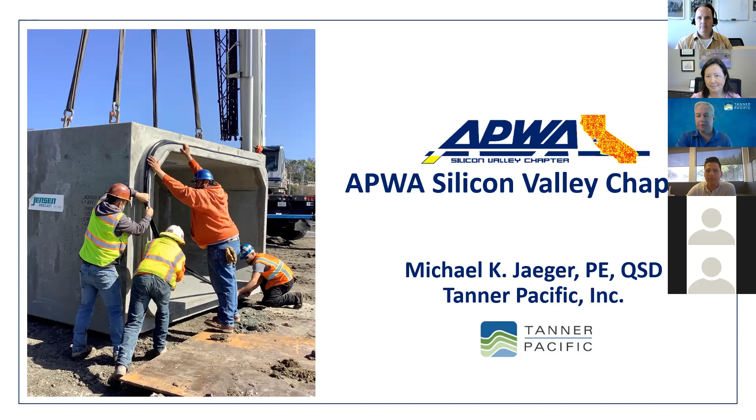Okay. So thank you for allowing me to have a few minutes here. I'll try and go through this pretty quickly, but Tanner Pacific, I'm a principal partner of the firm that helped found the firm. We are now celebrating our 5th year, and I think 3 or 4 years as members of APWA. So really enjoy being a part of this chapter. And another one of our engineers, Marina Chekmarova, who couldn't be here today, is also an active member. So we continue to be active in the chapter.

We have 42, soon to be 44 employees. And we have a variety of team members, from technical inspectors in the field, office engineers, CMs, and administrative staff, to make sure that the company runs smoothly, do all the things that we have to do. Our main office is here in San Carlos, but we're growing. We actually are trying to develop an office in Seattle and another office down in Southern California. So things are growing carefully, but we're very excited.

So a little bit about us. We like to do construction. That's our big thing. We are construction managers first and foremost, mostly in water resource type projects. But we're building and we're growing. Some of the areas where we're growing is on the program management side too, becoming owner advisors early on. And we've included some people in our firm who have a lot of that experience. And so we are working on some large programs around the Bay Area, and as noted, in the Seattle area and in the Southern California area. So it's another facet that we are growing.

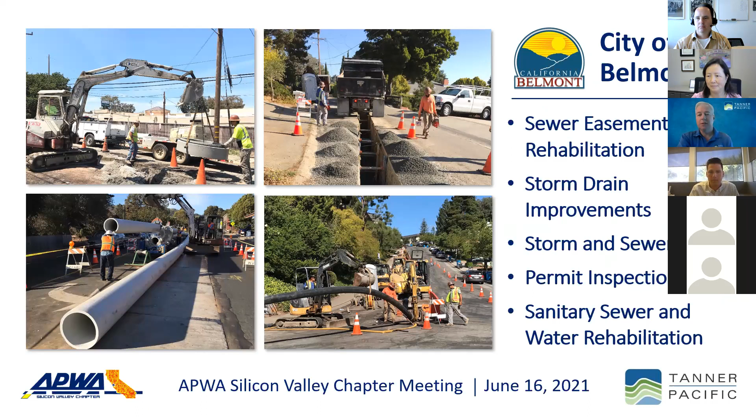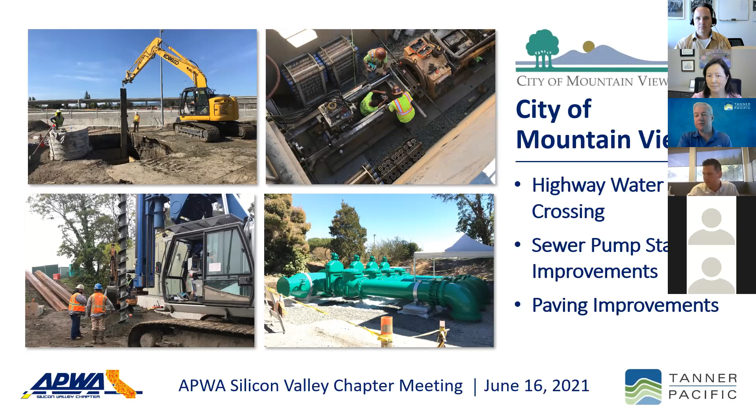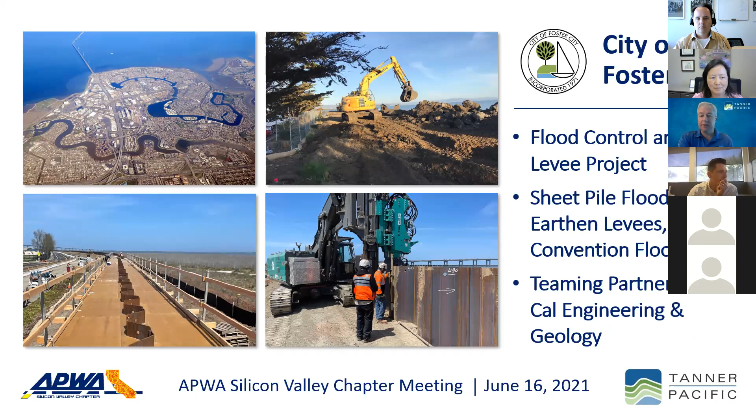Another very interesting project is one of the first levee improvement projects for sea level rise on the peninsula in Foster City. And speaking of teaming, the next person to present, Dan Peluso, is part of our team, Cal Engineering and Geology. They're a very, very important member of this team because of the type of work that's going on. And they were very integral in helping us win this project. So we're very happy to join them and continue to look for opportunities for us to work together.

Right. Dan? Can you hear me? Yes. All right. Let's see if we can get this going here.

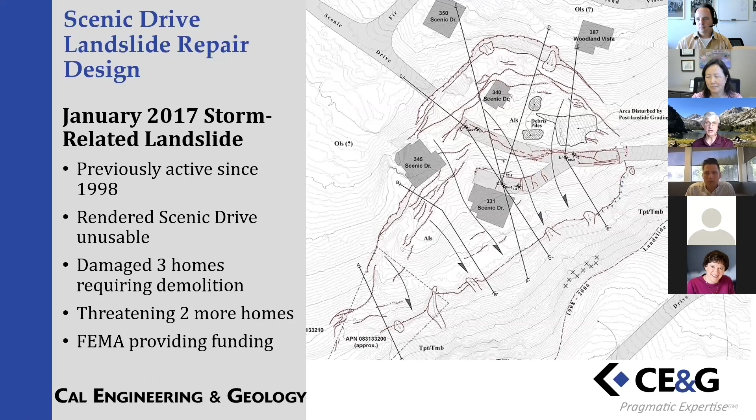Landslide repairs are some of my favorite projects. This landslide you see an image here is in a neighborhood in La Honda, San Mateo County. A fairly sizable landslide kicked off in 2017, and they contacted us to not only evaluate a geotechnical design, but also prepare plan, specs, and estimate for the repair. And that is supposed to go into construction this summer.

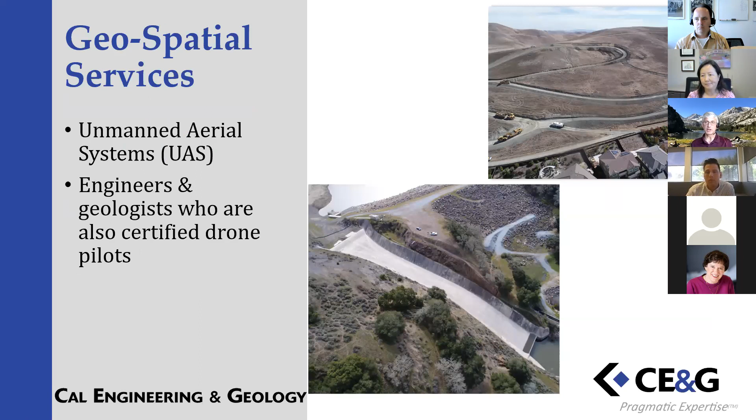Our geospatial services include unmanned aerial systems like drones. We use them for anything from preparing topo maps, using it in our construction management for change detection, and also inspection of spillways and a variety of other things. Our GIS specialists have created a geo viewer that I use regularly internally to look at various maps that they've uploaded to our system. We've also created a project-specific web portal for the Foster City project and other projects that allows the people involved to track certain information, and it's been very helpful. We also offer LiDAR scanning for things like pre-construction surveys and a variety of other usages.

Our staff also provide expert engineering assistance to various agencies to oversee public works projects, review development plans, and provide geotechnical peer review for submittals to the cities. And lastly, next time you go to check your Facebook feed, maybe go to the App Store instead and check out our app. It's called CE&G Now. What it does is it allows anyone like Public Works agency staff to take pictures of, say, a damaged slip out of a roadway, type in a message and send that to our project managers so they can get a response from us right away.

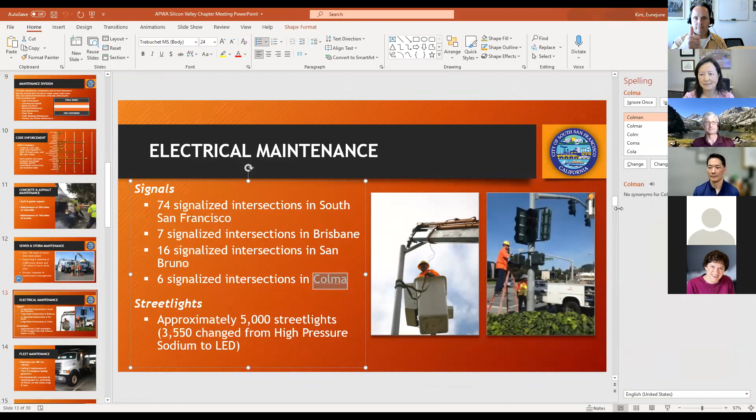Thank you, Lisa. I'm going to share my screen. Let's see how I do this. Here we go. You guys see my screen? Yes. Let me see here. How do I get rid of this sidebar? Go to slideshow at the top and do start slideshow. There you go. Okay. From beginning on the far left there. Yeah. All right.

So my name is Eunejune Kim, Public Works Director and City Engineer for South San Francisco. Thank you for this opportunity to showcase South San Francisco. As you guys know, we are located in the Bay Area, just south of San Francisco, north of San Bruno.

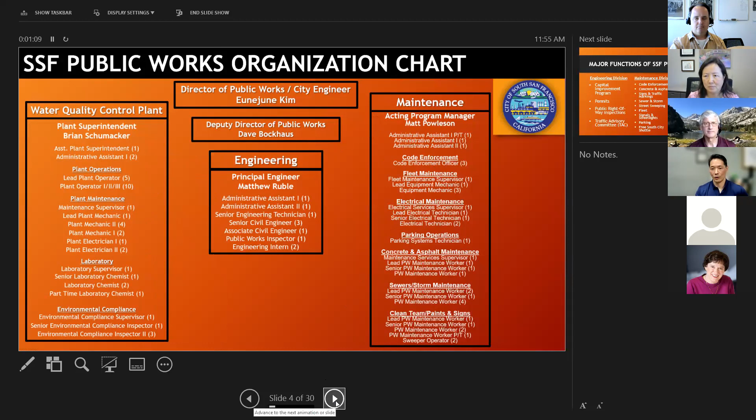We have three major divisions in our department: the wastewater treatment plant, we call it the water quality control plant. Engineering, Matt Ruble, the principal engineer, is also here today. And we have our deputy director, Dave Bockhaus, here. And we have our maintenance division, a lot of different services: code enforcement, fleet maintenance, electrical. I'll go over these in the next few slides.

So engineering division, as you guys all know, has CIP and permit reviews, traffic advisory committee for a lot of the traffic calming requests we get through this city. Our maintenance division is pretty robust. We provide services to other agencies, and I'll go over that in a little bit. But we also have a free South City shuttle and parking lots that we maintain in our wastewater treatment plant. We service adjacent cities nearby, as well as the San Francisco airport.

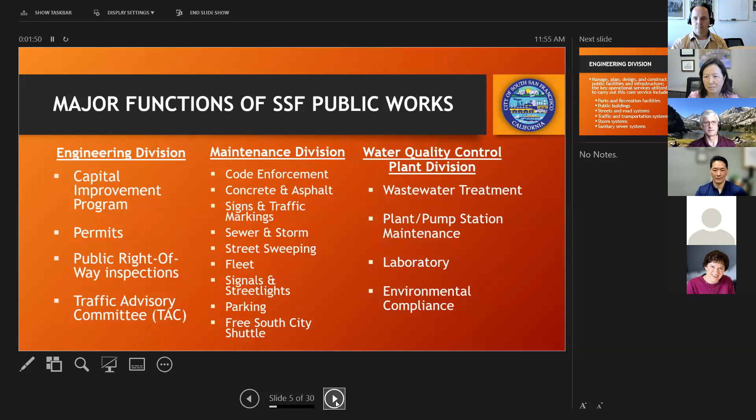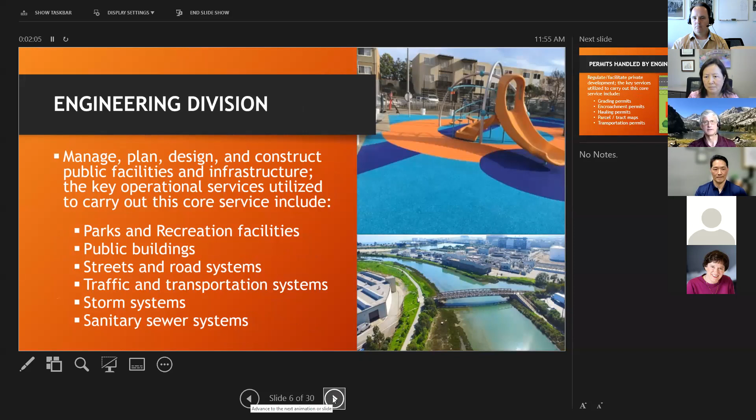So let's go over the engineering division. We do parks and rec facilities, buildings, streets and roads, traffic, storm drain, and sewer. Some of the permits that we handle in engineering is review of grading permits, encroachments, hauling permits, review of subdivision maps, and transportation permits. Our CIP budget is about $280 million for the next fiscal year. A good portion of that is in sewer, public facilities, streets, and then you got traffic and storm drains and parks.

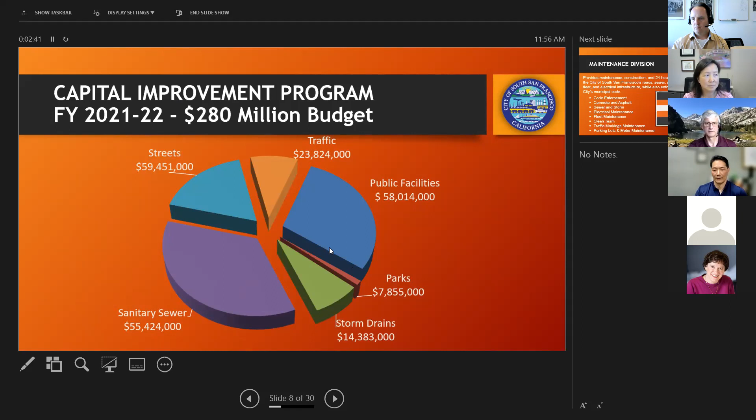In our maintenance division, we try to provide 24-hour response, especially to sanitary sewer overflows, but also to like signal knockdowns. Especially these days, clean team is a big issue. I think if you guys are with a public agency, there's a lot of homeless encampments and illegal dumping going on, which is a continuous problem in the Bay Area.

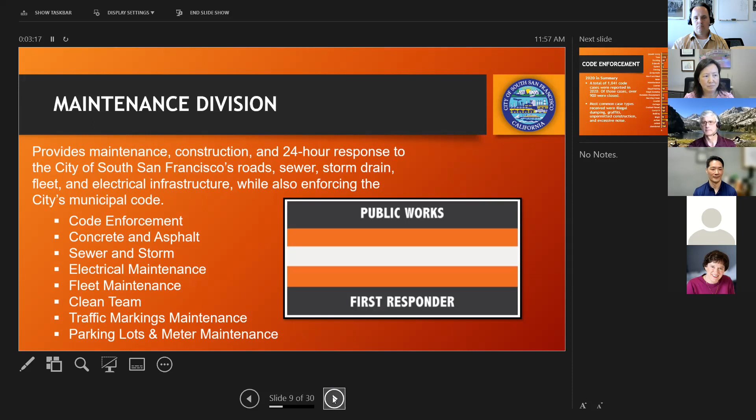So in our code enforcement, we have a lot of cases that get reported. And, like I said, the majority are illegal dumping, graffiti, some unpermitted construction noise, but the common complaint is basically illegal dumping, garbage, homeless encampments. So kind of melds all of that together.

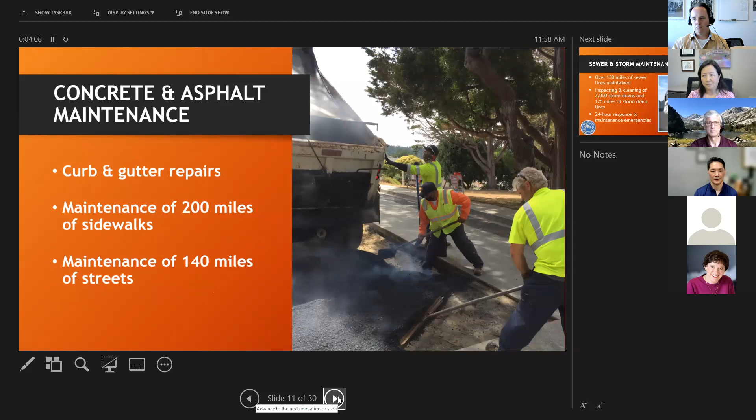Concrete and asphalt maintenance. We have over 200 miles of sidewalks, 140 miles of streets that we work to maintain. So we just do spot repairs for the most part, and the CIP projects take care of the larger planned maintenance. And that goes the same with sewer and storm. 24-hour response is our goal, and we pretty much adhere to that.

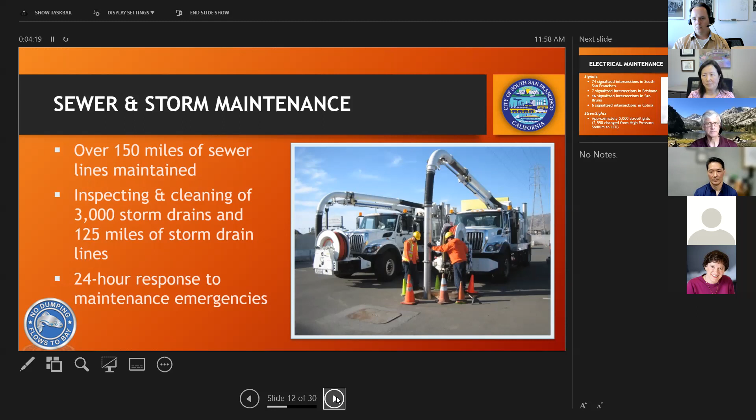We have 74 signalized intersections in South San Francisco, and it's growing because we're putting in more signalized intersections. We have 4 underway right now, and that'll be bumped up to nearly 80. We take care of the 7 signalized intersections in Brisbane, 16 in San Bruno, 6 in Colma. We have about 5,000 streetlights as well.

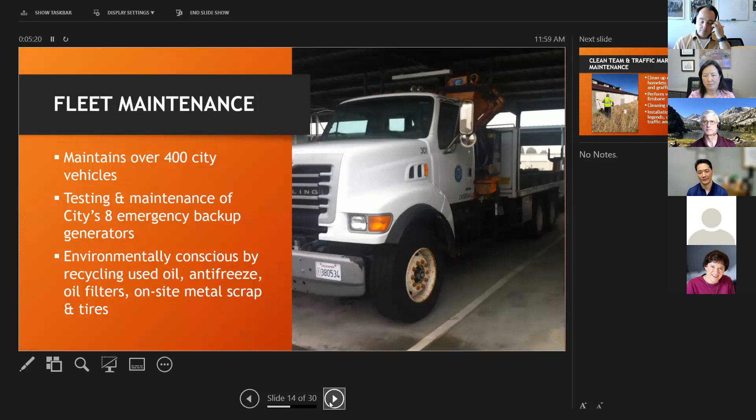We do fleet maintenance. We have over 400 city vehicles, and we try to be environmentally conscientious, recycling used oil, antifreeze, etc. But we also have recently installed about 40 electric vehicle chargers, and we have just started to electrify our fleet with an order of 2 Chevy Bolts for our code enforcement division. And those will be our first electric vehicles in the city.

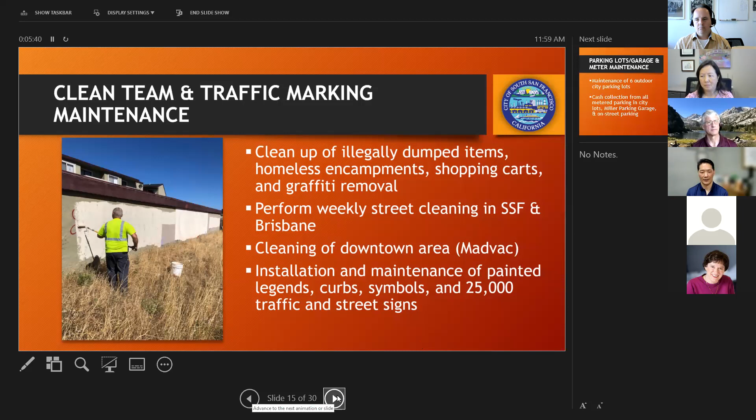A clean team takes care of the graffiti, illegal dumping. We help out Brisbane with street cleaning sometimes, and refreshing the symbols and the markings and the signage. We have parking lots and the parking meters associated with our downtown we maintain.

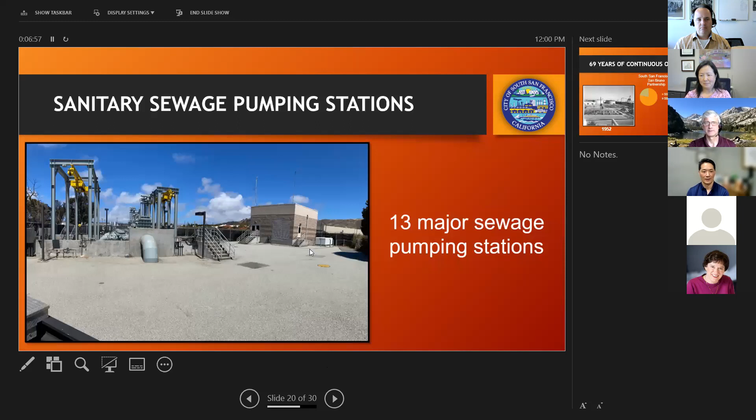Our wastewater treatment plant is happily taking crap from our residents since 1952. We have a lot of work going on here, probably close to $100 million of work going on right now under construction. Over 150 miles of sewer lines in the collection system, 13 major sewer pumping stations throughout the city. And we'll get more into the improvements at our wastewater treatment plant.

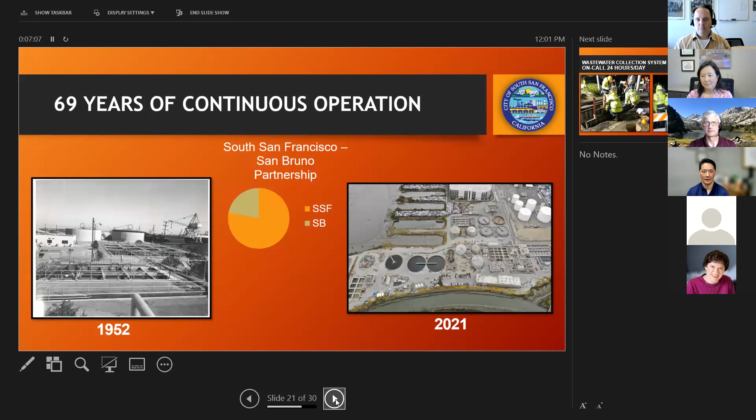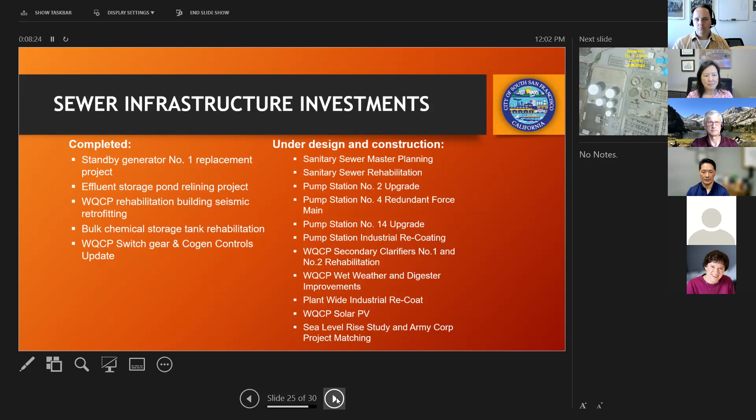So, as you guys know, a wastewater treatment plant requires a lot of continuous maintenance work, as well as a lot of upgrades due to the changing environmental regulations. So under construction, we have not only our pump station upgrades and our normal re-coatings and redoing our SCADA and cogen and our electrical infrastructure. We're also doing a sea level rise study for potential sewer and to protect the plant from sea level rise because the outfall is near the bay.

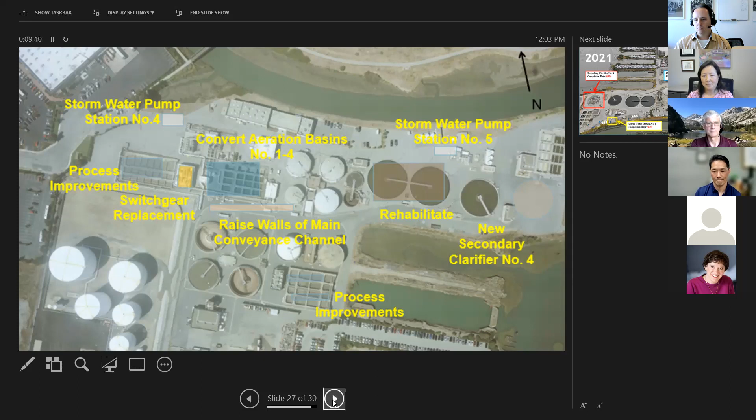One of our clarifiers is being upgraded right now, and that's under construction. For our digesters, we took out two and put in one more efficient and larger one for a better digestion system called the Omnivore. If you guys aren't familiar with wastewater treatment, you probably wouldn't know that. It's pretty proprietary, as well as completing some different rehabilitations.

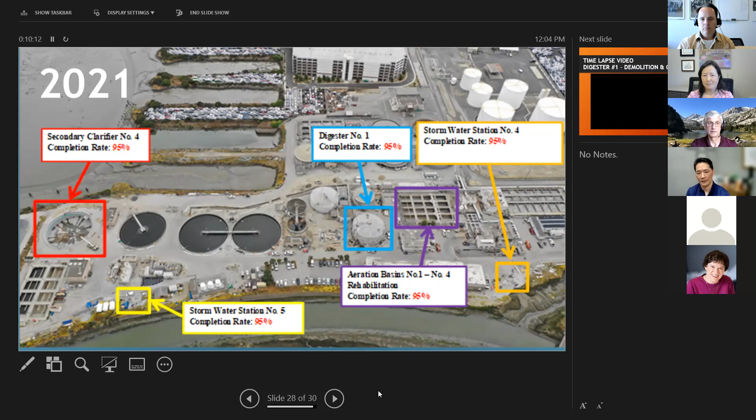Basically, our treatment system was only able to provide about 35 million gallons per day of primary and secondary treatment, but the EPA requires everything to be treated because we experience up to 60 million gallons per day during high storm events. So we upgraded the treatment capacity to have primary and secondary treatment of everything going through the system.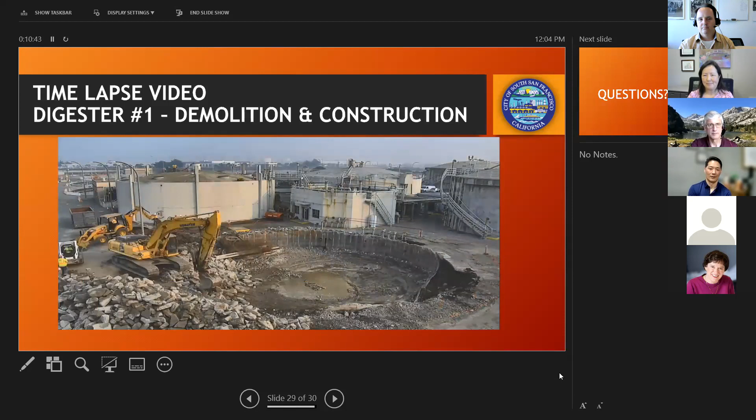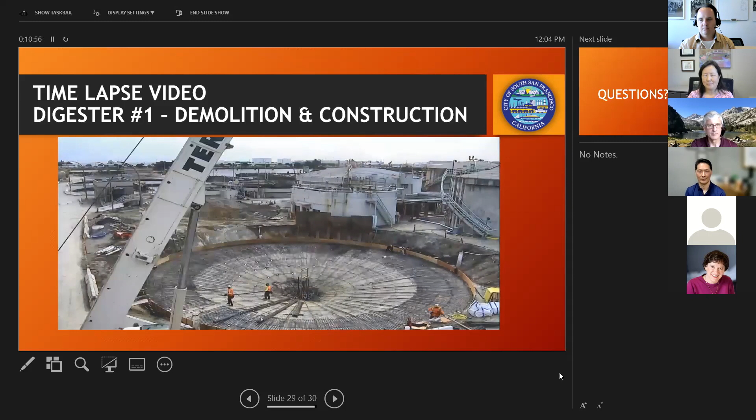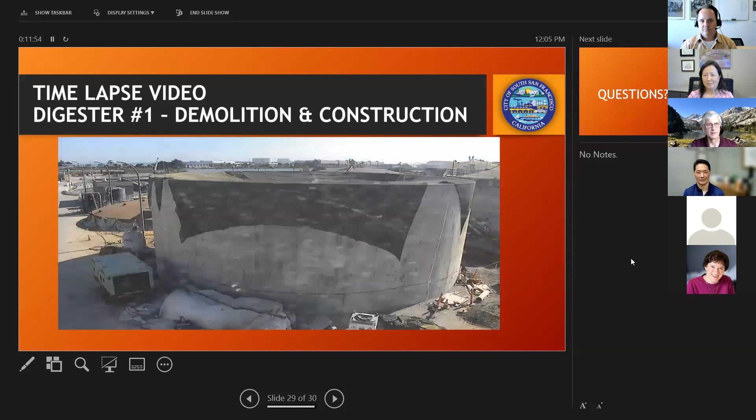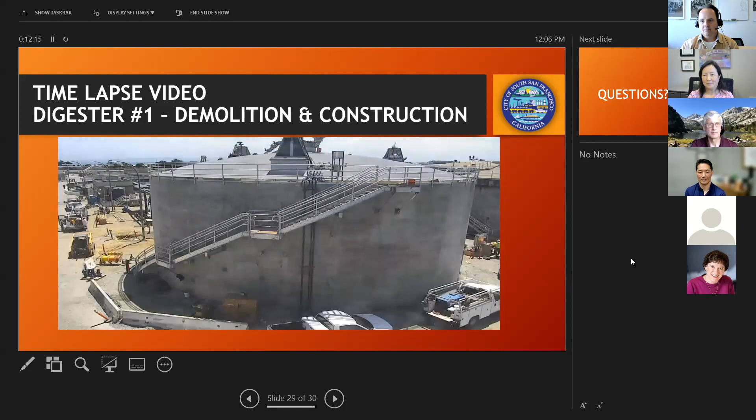Here's a time lapse of the construction going on. Let's see if we can do this. Here it goes. This is the digester that's being upgraded. Demo the old one, put in the pad for the new one, piping. The prime contractor on this particular project is Flatiron. Voila.

Questions from the group? Anyone have any questions for EJ? Oh, I definitely learned a lot about your city, EJ, that I never knew about South San Francisco. Your department offers a wide variety of services. Yeah, really interesting. The wastewater treatment plant serves San Bruno, Colma, SFO, Millbrae. So it serves a little community over here, basically. Yeah, it's interesting to learn about your collaboration in helping other cities service their streetlights, and this partnering at the treatment plant. That's really unique. All right, well, thank you for your time.

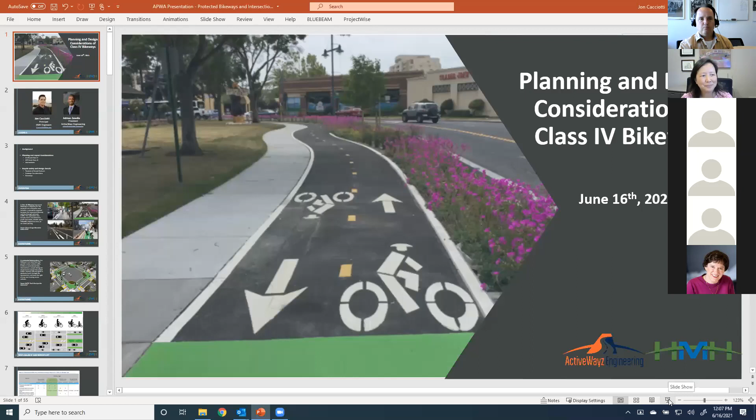Yeah, thank you. All right, now we'll move to our main presentation for today. The presentation is on the planning and design considerations of Class 4 bikeways and protected intersections. We have two of our board directors giving the presentation. Atmas Zudi is the founder and president of ActiveWayz Engineering, a San Jose-based transportation consulting engineering firm focused on active transportation project delivery. Atmas has over 22 years of experience in planning and designing various types of transportation projects. Since founding ActiveWayz, he and his firm have primarily focused on delivering active transportation in the Bay Area. In his design approach, Atmas looks to develop solutions that enhance safety for all road users by focusing on simplicity of design that leads to intuitive, predictable, and forgiving transportation infrastructure for all users.

And Atmas will be joined by Jon Cacciotti. John is the principal of HMH Engineers and leads their public projects team. John graduated from San Jose State University and has 15 years of experience leading active transportation projects. He has led the bicycle and pedestrian elements on dozens of local roadway and Caltrans interchange projects throughout the South Bay. So without further ado, we'll have Atmas and John begin their presentation.

Thank you, Lisa. Can I have someone confirm that you can hear me and you can see my screen? Yes. Perfect. Thank you so much.

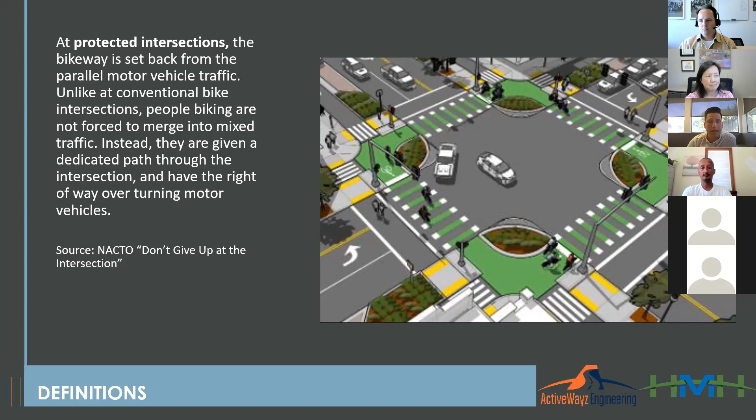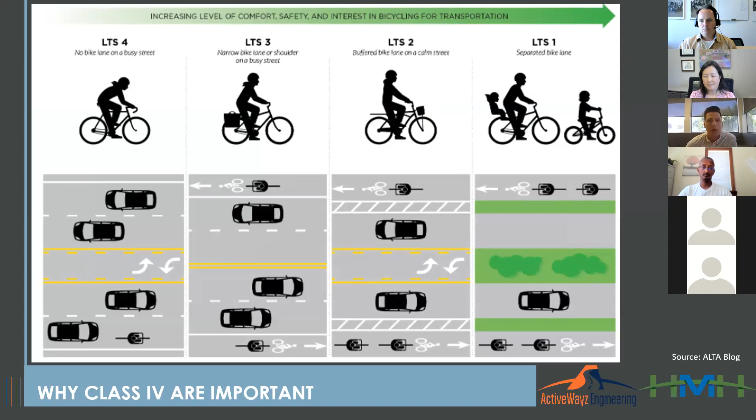So why are Class 4 bikeways important? Alta did a good study a couple of years ago on just the level of traffic stress. On the left is essentially no bike facilities. On the right would be a fully separated bike lane. And very intuitively, they found that as you increase the infrastructure associated with your bikeway and increase the separation, that level of traffic stress is decreased. And so your users are more likely to want to use the facility, and the perceived safety is increased.

So we're really not focusing on those strong and fearless with Class 4. It's about moving those interested but concerned up a notch into that enthused and confident group, and getting them excited about making that mode shift.

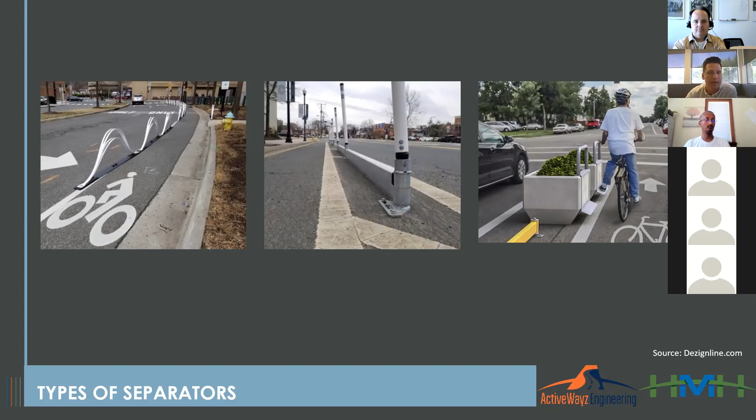One of the first things we always do is look at your cross-sectional width. Some pretty easy questions that are always asked is, can your lane widths be reduced? Do you want a hardscape or a landscaped buffer? Do you want to use this buffer for C3 treatment? There's a great opportunity there if you've got the right of way to incorporate C3 treatment, consistent with a lot of local council goals for rolling out stormwater treatment on your roadway projects, even if it's not technically required for a bikeway project.

One gotcha that we've seen a lot is considering shoulders. That bottom image down below is a buffered bikeway. Very often in planning documents, we'll see the recommendation to be, hey, slap on a bike buffer or a curb or delineators and turn this into a class 4 bikeway. That's great, but local agencies should be deliberate and recognize that by eliminating the ability for a vehicle to drive across your buffered bikeway, you are eliminating the shoulder.

Per Caltrans, class 2 bikeways are considered shoulders. Class 4 bikeways, because they are not navigable by a vehicle, are not shoulders. So you should be thinking about your disabled vehicles or emergency operations and being comfortable and seeking those design exceptions if you're proposing a facility that would eliminate shoulders that are there in the existing condition.

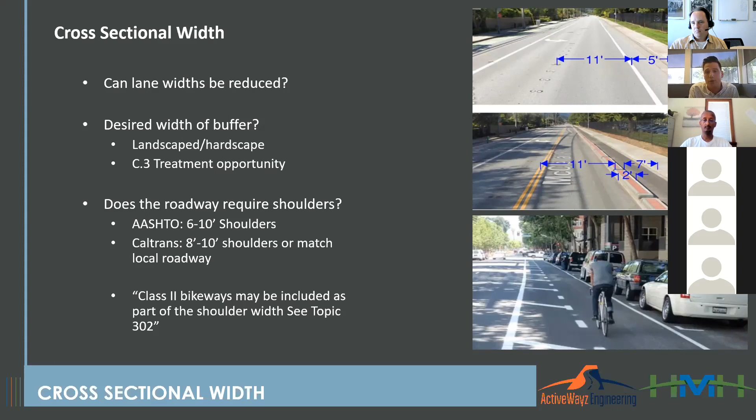Another one that many agencies are seeing and aware of, but make sure you know what your street sweeper width is. I've worked on a handful of projects that in the planning phase, it says, yep, we want a 6-foot bikeway. And when the rubber meets the road in design and maintenance is finally looking at the project, they say, wait, our minimum sweeper width is 10 or 12 feet. We can't get in there to maintain this bikeway. So we need to step back and reassign that roadway width or the bikeway width to be able to accommodate street sweepers. Some agencies have procured modified street sweepers that are out on the market, like the one shown here in San Francisco that has variable width sweepers and can accommodate those narrow bike lanes.

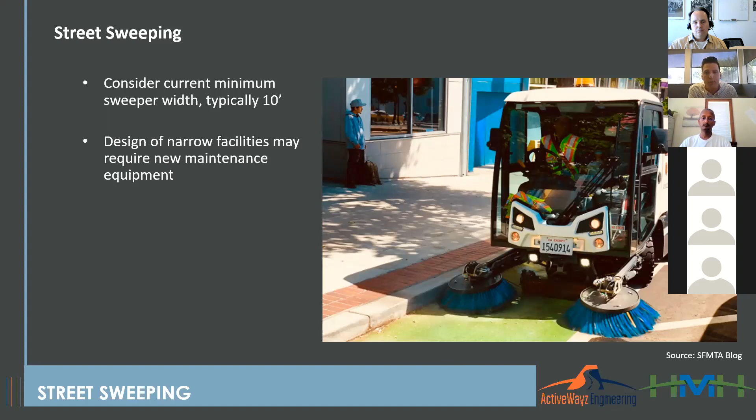As you move into the off-street environment, these are sometimes known as the Dutch style bikeways or off-street cycle track, sidewalk level. There's a new slew of complexities that get introduced as you have to deal with the interface of your bikes and pedestrians. One thing that we've learned and heard pretty consistently from the local biking community as we meet with various BPAC groups and bike advocacy forums is having redundant accommodations for your high-speed cyclists.

This is an excerpt from our 280 Wolfe project where we have signalized perpendicular crossings for those all ages and abilities users, those bicyclists that may not be comfortable merging with high-speed freeway bound traffic, which obviously is very complex. So we've got actually duplicate facilities here. The high-speed cyclists like this weaving with your right turn pocket as shown in red, but then we've got the duplicate facilities in green for those all ages and abilities users that don't mind waiting at a stoplight and would much rather queue up there rather than have to weave across vehicles. So bikeable shoulders and redundancy for all the different types of users you expect is something that will affect your layout.

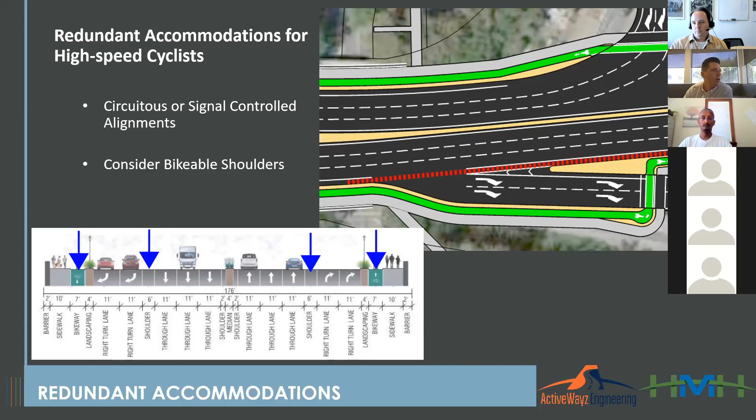Thinking about the separation for bikes and pedestrians, there's really not great guidance. It's very vague right now about how to separate bikes and pedestrians on these facilities. You want to be thinking about something that's navigable, flexible, can maintain ADA compliance, so a visually impaired user is not accidentally crossing into your bikeway and subject to a collision that they may not know they're in an area that they're not supposed to be walking in.

Caltrans Design Information Bulletin 89 is so vague. It simply says a continuous detectable vertical element. I've heard members of Caltrans team interpret that as little as a 1 or 2 inch curb and as significant as a barrier or a fence. And so it's very, very vague as far as what they require. We've worked with them to kind of scale back the logistics of having a fence actually between your bikes and peds and what that would actually do to the operations and the complexities of how a cyclist would have to navigate this area safely.

NACTO does take it a step further. They talk about the vertical separation between cycle track and sidewalk should be 0 to 5 inches. So at least they're giving you some clue about potentially having a curb there. Again, you want to be really thinking about if there was debris in your bike lane, could a bike get out of the bike lane, or would they be essentially trapped? And how would a bicycle and a pedestrian kind of navigate this space if there were issues in their designated areas?

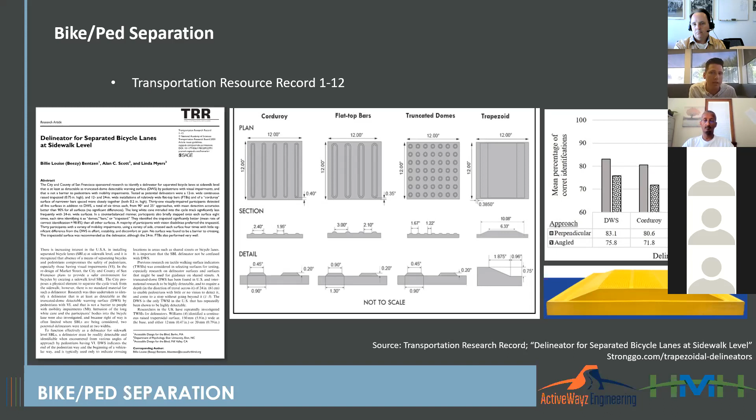What they found and what the study recommended is that trapezoidal shape there, they were actually seeing an average percentage of correct identifications upwards of 98%. So really good detection by visually impaired about how are they entering into or crossing into a facility that they shouldn't be crossing into. So we're seeing some local agencies, including the city and county of San Francisco, adopting some of these types of elements. But as you're rolling out off-street facilities that are really great, you want to be thinking about this. It's a big area of liability for ADA compliance and bike collisions.

You also want to be thinking about pavement materials on that same line, detection and distinction, making sure it's clear where the bikes are supposed to be and where your pedestrians are supposed to be. Think about ongoing maintenance costs of what your bikeway is made of. Typical materials, asphalt and concrete are being rolled out. Asphalt does have the inherent benefit that it does not look like a sidewalk. So it's very intuitive to most users that that's not an area for pedestrian walkways.

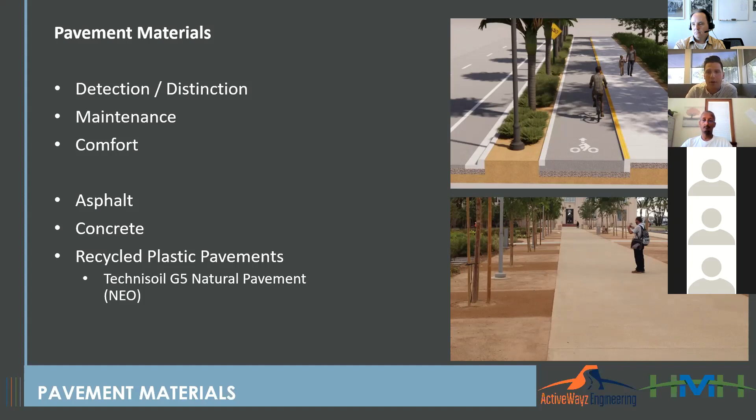We've also seen some tech campuses in the area roll out Technisoil's G5 pavement. It's made of a combination of recycled plastics, and they claim it has better durability than asphalt and concrete in these uses. So we're seeing some adoption in the private side for some alternate materials. That's kind of exciting.

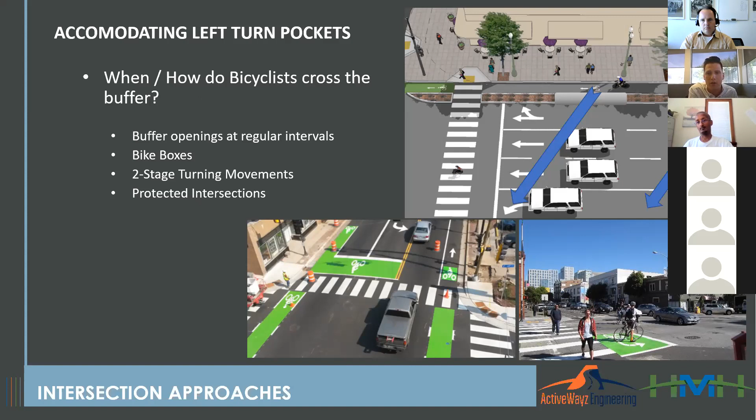They'd rather wait in behind the curb on the crosswalk than in kind of an exposed configuration out in the roadway, which leads us to protected intersections. With Class 4 bikeways, protected intersections are a great way to accommodate your bikes at the signal. Some considerations of a protected intersection: your bikes are crossing separate from the roadway, much like a pedestrian. And so these kind of go hand in hand with Class 4 bikeways to get your facilities through the intersection. They're state of the industry and really being adopted throughout the nation pretty quickly.

When laying out your protected intersections, first and foremost, truck turns. I can tell you within an hour of looking at your intersection and running some quick numbers whether or not a protected intersection is even on the table. Truck turns will govern your protected intersection, and if you've got narrow right-of-way or tight curb returns, it's probably not a good fit. There are some nuances here, though, that we should be aware of.

NACTO does provide guidance on the differences between a design vehicle and a control vehicle. And it is important and can provide a lot of opportunity for you to tighten things up for bikes and peds. Your design vehicle is a frequent vehicle that remains in its own lane at all times. This would be a FedEx delivery truck or kind of a moving truck, a vehicle that might be expected to make this movement daily. Whereas your control vehicle is the largest vehicle legally allowed to navigate this turn.

So if you do accommodate trucks, or this is on an interchange or a major thoroughfare, these would be large trucks that might be infrequent to make this turning movement, but you do want to be sure that you can accommodate them, and they are allowed to sweep across lanes in the same direction of travel. So on a multi-lane roadway, these control vehicles that are infrequent, depending on your facility, you can consider them to sweep out and around to make this curve.

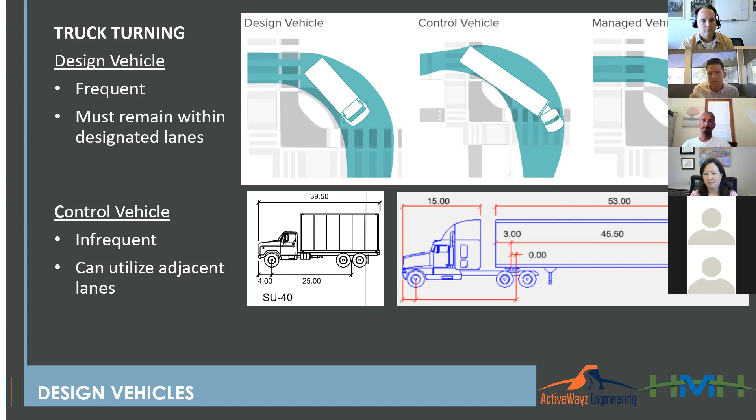If that's not 6 feet wide, essentially what Caltrans has interpreted the code to be is that you need to signalize your bike crossing. So you can imagine how uncomfortable or unusual that would be if at that yield control with your bikes and pedestrians, you actually have a bike signal separate or in anticipation of the future signal and trying to time those together. So having that 6 foot refuge is valuable. It allows your pedestrian to get up closer to the roadway, shortening your crossing distance, as well as allowing that crossing to be yield control.

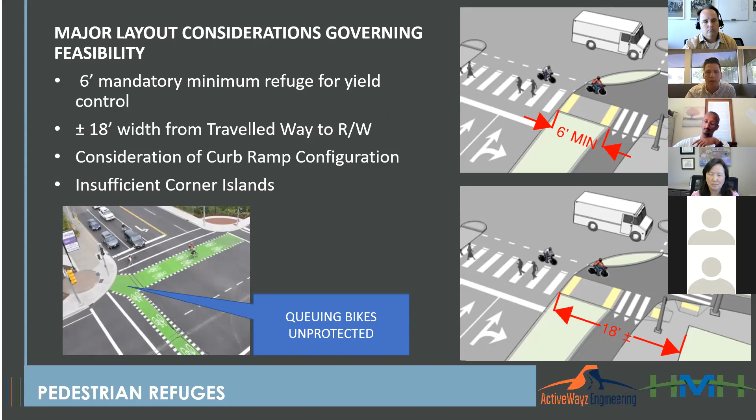And it also encourages your pedestrians to wait closer to the roadway. As long as you've got an ample space there, your crossing calculations for the signal phasing cycle can be reduced because you've got a shorter crossing distance. One thing we are aware of on all of our protected intersections is they do typically come with a reduction to level of service for traffic operations. So anything we can do to offset that degradation is valuable.

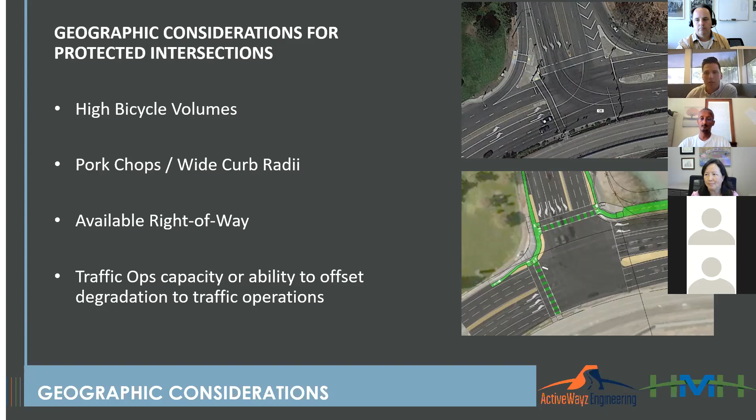Well, we added double right turn lanes in each movement so that we could fully protect our bike movements and accommodate our two-way movement. So the pedestrian and bicycle phases here are fully protected when those are activated by your bikes and peds, and we offset that degradation with improvements to the roadway geometry to accommodate that additional queuing. So with that, I'll pass it to Admas, who can talk more about some of the details that can elevate your project to the next level.

Thank you, John. And I will focus on safety aspects of our design when we try to encourage more bicycling and protect bicyclists from vehicles. Got to make sure that our design does not introduce new risks for bicyclists. So that's kind of the focus of my portion of the presentation.

And I have a poll that Jason will help me run. Jason, can you initiate the poll? Very good. So I have just a 2-question poll. How many times have you fallen off your bike on a paved public road? And the second question is, how many times have you fallen off your bike because you were hit by a motor vehicle? So if you could respond to this poll, that would be really nice. I'm going to put that to the side. And if you can continue to the next slide, John.

So most design solutions and most design guidelines focus on vehicle and bicycle accidents. I'm talking about protected bikeways and bikeway design in general. But our design must also consider non-motor vehicle related safety factors.

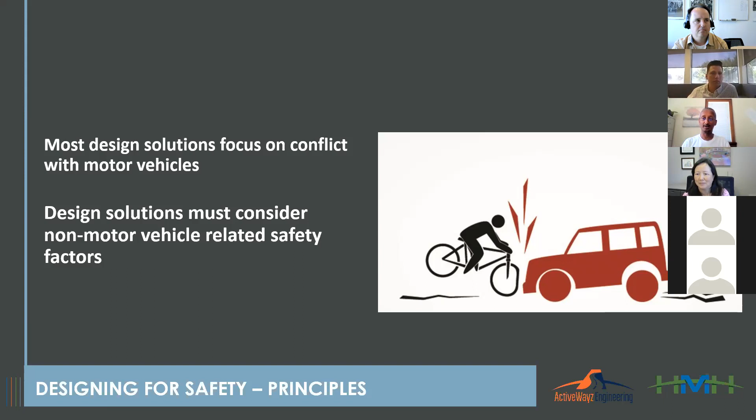Awesome. So we have one person that was engaged in a vehicle-related bicycle accident, whereas we have a number of folks that have fallen off their bikes, ostensibly by themselves, or maybe colliding with some other person on a bike or some other sort. Personally, my experience has been I've fallen off my bike 4 times. I'd be the one there at 4, and all 4 times have been without any involvement of a vehicle. Thanks for participating. So the main point here is we also need to understand that bicycle accidents occur without cars.

The reality is that most bike accidents are infrastructure related. And this is a study done in the Netherlands. And yeah, they are embarrassing. I get up quickly as soon as I fall down. So infrastructure related crashes represent about 52% of single bicycle crashes on paved roadways. And I've highlighted in red here what I think are infrastructure related, design related or improvements that we intentionally put on the roadways as facilities, and the relationship of those with the number of accidents.

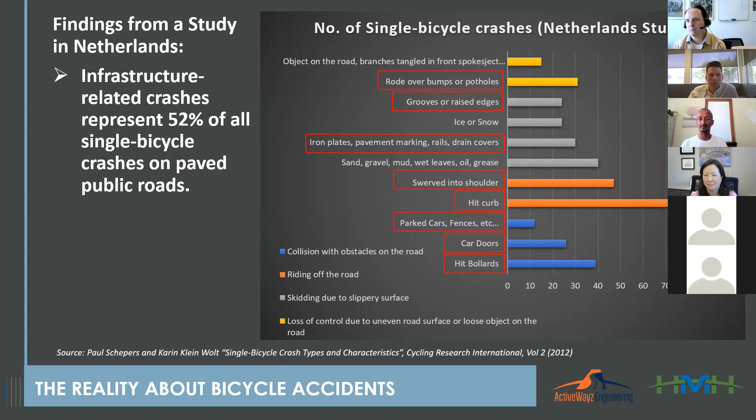And I specifically want to highlight the two in orange, which is swerved into shoulder. These are people that leave the designated bike lane and crash into a pole or off the embankment or something like that, and hitting a curb with their front wheels or with their pedals. So a significant number of bicycle accidents occur due to some of these elements. And even the other ones are related to maintenance aspects that public works departments should be interested in. Next.

And the data also shows that most of these accidents are represented by younger children and the elderly. Again, these are the two demographic groups that we would like to encourage to use our bike facilities more. And in their interaction with the built environment, they are the ones that are being the victims more often. And also women. So the light line that you see is women. So elderly women are represented very highly in both emergency room visits as well as hospitalization after a single bike crash.

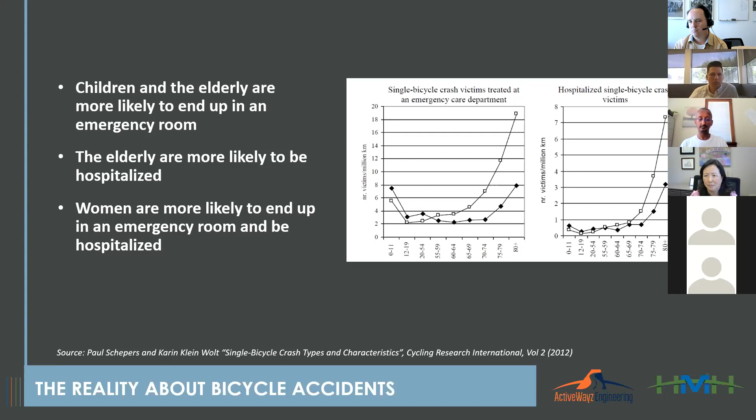So what is the decision making as a bicyclist? I think as designers, we need to understand from the perspective of the bicyclist that bicyclists are actually very vulnerable on the road. They have to balance on two wheels, and their only protection is a helmet they put on their heads. And meanwhile, they are expected to make very complex decisions. And many of them, younger or elderly folks, still are expected to make very complex decisions.

Here's an example of a protected bikeway approaching an intersection. And as a bicyclist, you have to worry about the change in the alignment of the path or the narrowing of the path. There's a pole on the one side. You don't want to hit the curb with your pedals on the other side. There's a gutter seam that you don't want to get your wheels stuck on. You have to watch out for the pedestrians crossing the street. You have to watch out for the cars making a turn.

And imagine doing this during evening time or on a rainy day, or a young child heading to school, or an elderly person going shopping. It's a tough task to be a bicyclist on our roadways. So we have to be very mindful of the types of improvements that we put on the streets.

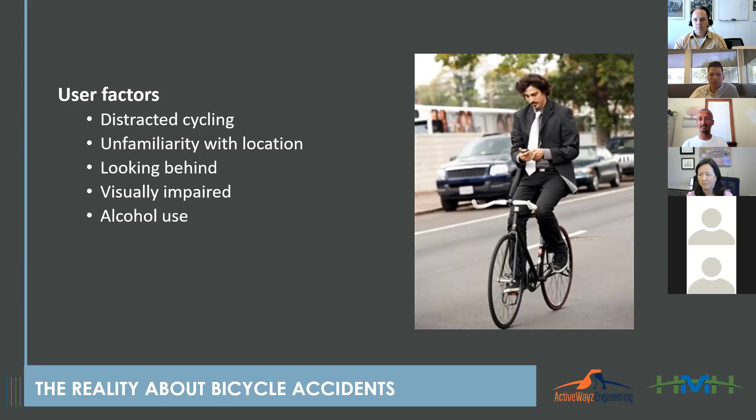Other factors, of course: bicyclists are just a cross-section of society, so they're not perfect. Distracted cycling is a common factor in many of these accidents. Unfamiliarity with the location. A lot of the accidents also occur for users that have not had prior experience with the specific bike route. Looking behind for openings in cars. When you turn, your wheels are likely to turn with you. Visually impaired folks, many times bicycling is their only way of getting around other than walking. So that's a risk area. And of course, alcohol use, just like driving while intoxicated, bicycling is also probably more dangerous.

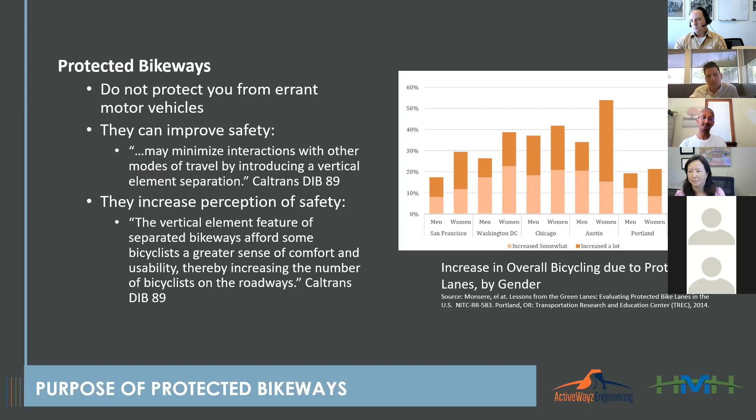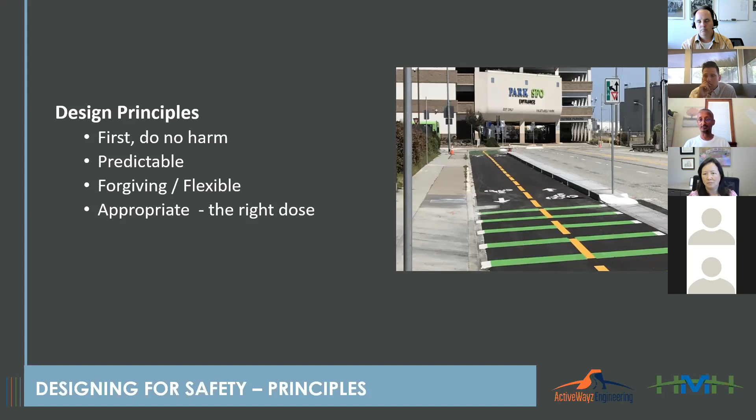Third is forgiving and flexible. Again, like we saw in the data, people do make mistakes. And when they make mistakes, our design should be flexible enough and forgiving enough so that any mistake does not lead to an accident. And finally, appropriate, making sure that our design is consistent with the context, as well as the level of protection that's needed. Next.

So let's look at some design details that speak to some of these things. I want to make a caveat here that this is not a recommendation for all projects. These design solutions are specific to the context of the project. So please consider them in that fashion. Next slide.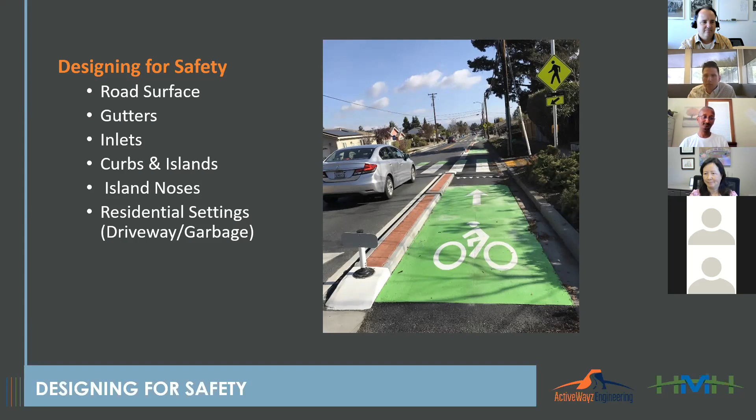So road surface is one of the critical safety factors for bicyclists. So making sure that the bikeway doesn't have unnecessary grooves or edges or bumps or manhole covers that are not flush with the pavement, or even the friction characteristics of the manhole plates, the DIs, the pavement striping, all of those things should be considered in our design. And I try to encourage public agencies to do a thin layer of overlay on a new protected bikeway facility to provide a smooth riding surface for users. So next slide.

Gutters. So in the Bay Area, the gutters in some of the local agencies are about 24 inches, with different cross slopes. There are about 73 days of rain in the Bay Area. And I see gutters being too wide, honestly. I see it similar to how we used to design for the peak hour for traffic operations, but we don't do that anymore. So we're designing for the 20% of the year where it rains, whereas bicycling occurs 365 days. And do these gutters really serve us well?

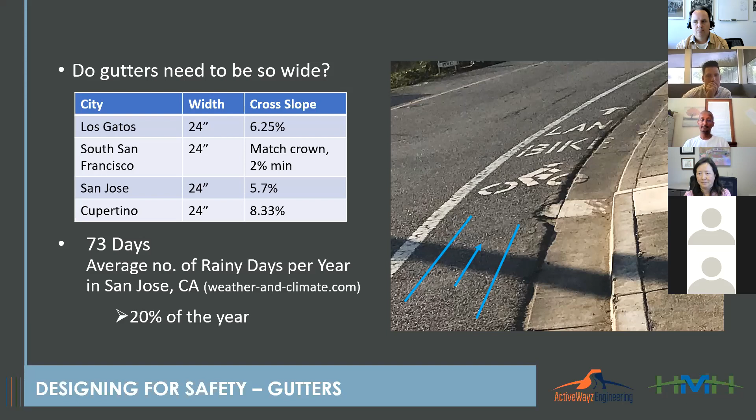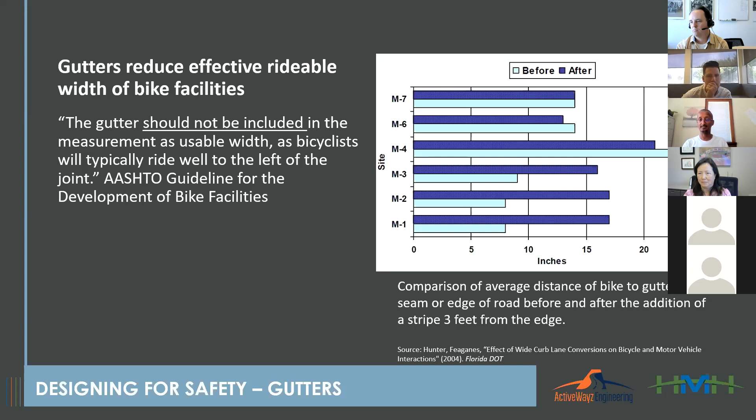Next slide. So again, a study about bike placement related to gutter lips suggests that people shy away from gutter lips by approximately 9 to 15 inches. So that really reduces the bikeable width of your facility. Now, in the case of a protected intersection where the protection is a curb, that really also limits the amount of space, because they have to shy away from the curb on one side and the gutter seam on the other side. Next slide.

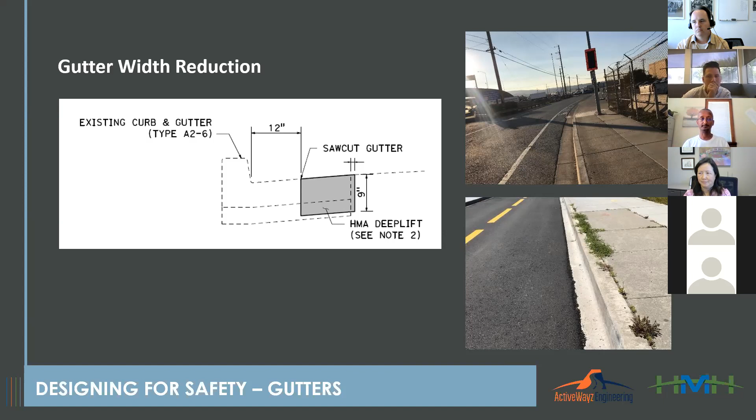So again, what I try to encourage folks to do is reduce the gutter width to about a foot. And the reason for that is the curb, the 6-inch curb, is also an obstruction that bicyclists shy away from. So typically they won't get any closer than 12 inches to the edge of the curb. So if we reduce the gutter to about 12 inches, we're essentially maximizing the bikeable width of the road, and also providing some drainage capacity for the gutters. Next slide.

Curbs. AASHTO identifies the purpose of curbs as drainage control, edge delineation, aesthetics, and other things. But what it does not say is that it provides protection for peds and bikes. So curbs are not intended for protecting us from errant vehicles. In fact, a car that hits a curb may lose control and be more dangerous.

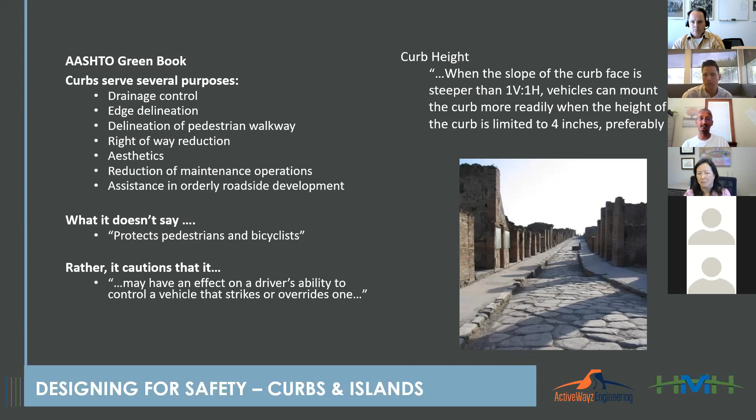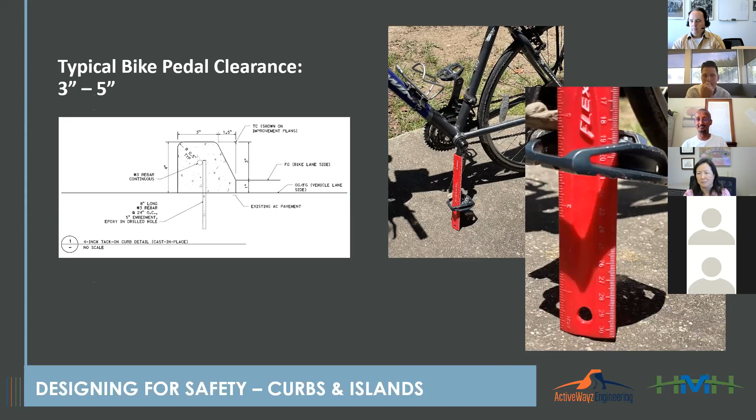So the other reason for using a smaller curb is the bike pedals are about 3 to 5 inches high from the ground. I measured my bike and it's about 3.5 inches clear from the ground. So with a 3-inch curb on the bike side, hopefully bicyclists will be able to avoid hitting the curb with their pedals as they ride through the facility. Next.

Here is a project that we did in Cupertino, where we used the same details that I'm talking about here. On the drawing on the left side, what you see is a 4-inch curb tacked onto the pavement on the vehicle side. It's 4 inches high, and on the bike side it's actually recessed 1 inch lower, so that the exposed face is about 3 inches for the bikes. So that's a design detail that we could use. Go on.

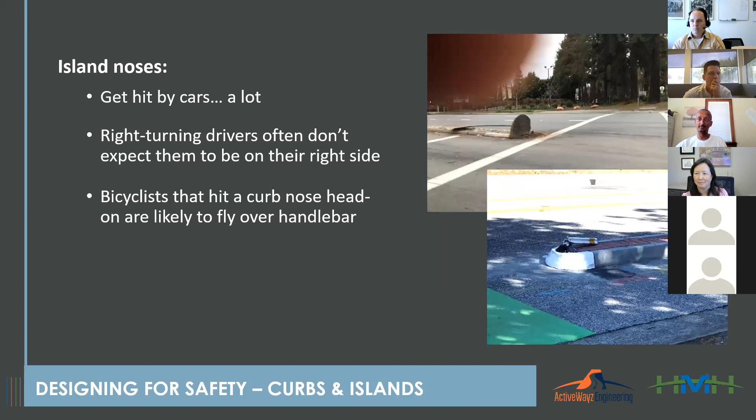Island noses can be pretty dangerous for both cars and bikes, so we should be careful about how we design them. Next slide. So here is an island design that we did in South San Francisco, again on North Access Road. Recessed, we embedded it into the pavement, and we tapered it so it allows for wheel tracking, as well as it's forgiving for bicyclists or cars that crash right head on into it. Next.

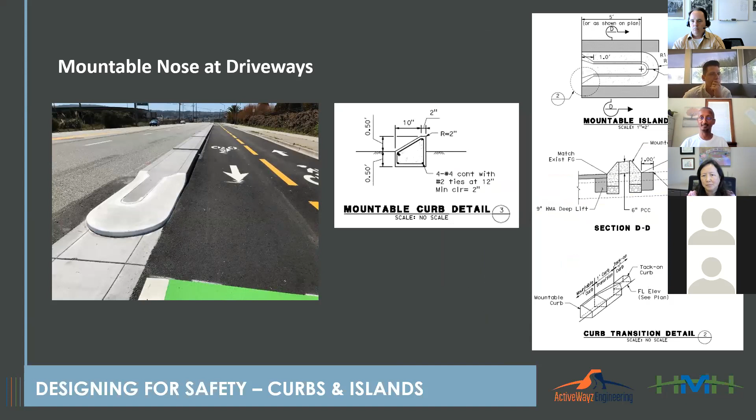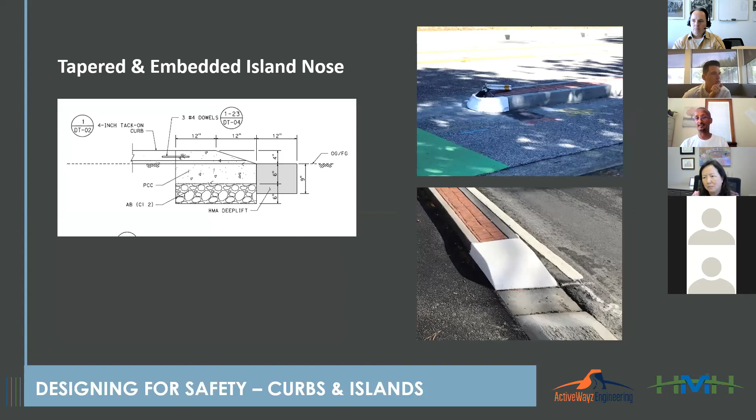So that same detail has been included in South San Francisco standard details as of December 2020 for future mountable median designs. Next. And here is a project in Cupertino, again, forgiving and flexible design, where we embedded the nose of the median into the ground to protect bicyclists as well as cars that may crash into it face on. Next.

Here's where it all kind of comes together. I know it's a little complicated: a couple of driveways coming from the top of the page, raised curbs on the approaches to the driveways on either side, shown in blue. And in the driveway area, we had a continuous band of a mountable island. That's the detail shown on the right side. And then we have small sections where the flush island is used just adjacent to the driveways. That's for the garbage bin zone, where residents are supposed to be putting their garbage.

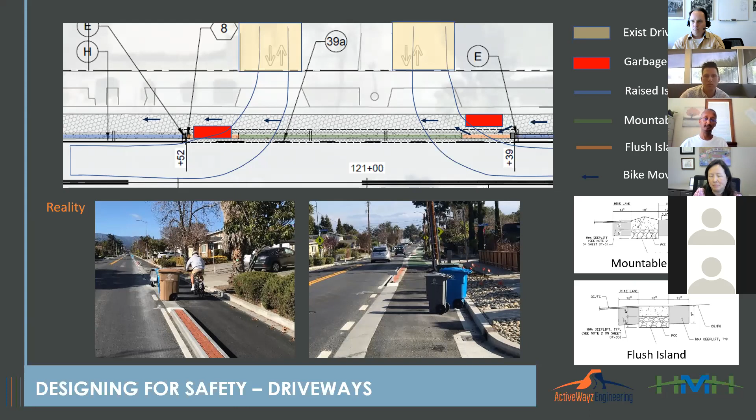So the pictures below show the after-implementation situation. As you can see on the left side, people place the garbage bins where they're supposed to, in line with the islands. The bicyclists can go as they're supposed to. But if folks put the garbage bins by the curb like they're used to, again, there's plenty of room for the bikes to get around. Next.

So these are some more details. And in construction, John Raymakers from the City of Cupertino did a mock-up, and we tried it out in the city parking lot before implementing it. Next. And this is the flat top portion, the flush island for the garbage bin placement. Next.

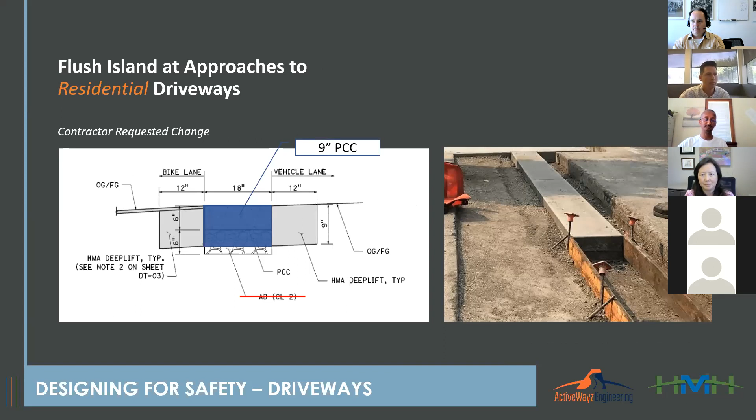And finally, this is a design actually on Clayland Road as well, but this is what John and HMH designed. I think it's an elegant design as well, where they shifted the gutter more into the traffic lane and then provided a curb in the valley gutter essentially. And where the driveways are, there are openings, and the garbage bins will be placed in that area. This removes a lot of the potential barriers for bicyclists on the edges. So it's one way to approach the design.

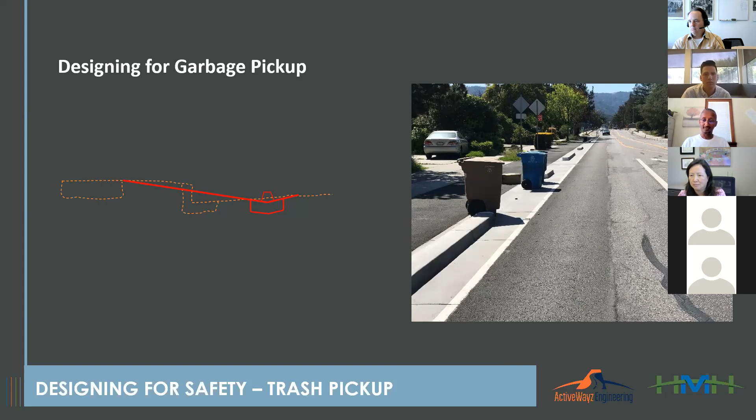So with that, we conclude our presentation. I hope that's been useful for some of you. I know we're running out of time, but if there are any questions, we'll be happy to take them.

Does anyone have questions for John or Amos? I posted a question in the chat. I don't know if you want to read that.

Sure, and I will tackle that since it's my project. Does Wolfe have both a class 4 and another bike lane, or is it experienced cyclists anticipated to ride in the shoulder? So that's an ongoing kind of discussion, but the plan is we have a fully off-street class 4, and then we have redundant bikeable shoulders. So those shoulders will have a 1-foot gutter.

They meet all of the design requirements of a bike lane, but we don't anticipate all of the paint and plastic that we would implement if it was a full class 2, because we want to be delicate to provide an opportunity and redundancy, but not encourage. We don't want a cyclist that's approaching the interchange to stay on street because they think that's the most appropriate place for them to be.

So we're encouraging them to get off street onto the class 4, but we have a redundant kind of backup system. And if someone finds themselves in the interchange, then they'll start to see the striping on the street telling them kind of where to be with the bike stencils. But at the divergence point, or when they're approaching the project area, most, if not all of the signage is going to be saying, get off street and go use this new facility.